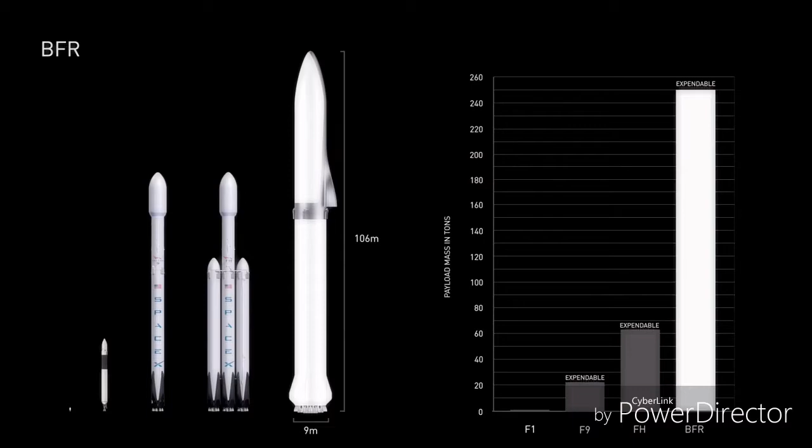So let's go to the next slide. And just by the way, with BFR, you can get a sense of scale by looking at the tiny person there. It's really quite a big vehicle. Main body diameter is about 9 meters or 30 feet.

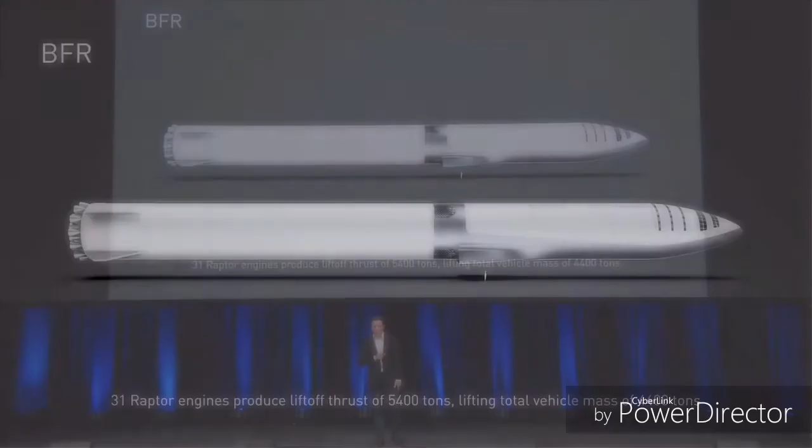And it consists of, the booster is lifted by 31 Raptor engines that produce a thrust of about 5,400 tons, lifting a 4,400 ton vehicle straight up.

So then, just the basics about the ship: 48-meter length, dry mass we're expecting to be about 85 tons. Technically, our design says 75 tons, but inevitably there's mass growth. And that ship will contain 1,100 tons of propellant with an ascent payload of 150 tons and a return mass of 50.

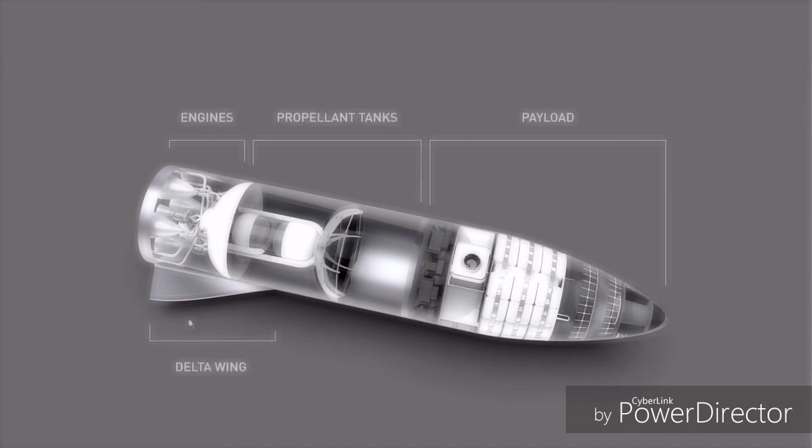So you can think of this as essentially combining the upper stage of the rocket with Dragon. It's like your Falcon 9 upper stage and Dragon were combined. So I'll go into each of these items in detail.

You've got obviously the engine section in the rear, the propellant tanks in the middle, and then a large payload bay in the front. And that payload bay is actually 8 stories tall. In fact, you can fit a whole stack of Falcon 1 rockets in the payload bay. Compared to the design I showed last time, you'll see that there is a small delta wing at the back of the rocket.

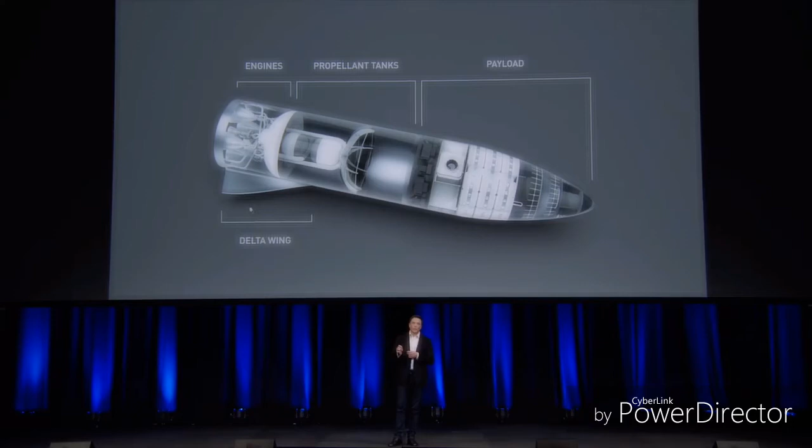The reason for that is in order to expand the mission envelope of the BFR spaceship. Depending on whether you're landing or you're entering a planet or a moon that has no atmosphere, a thin atmosphere, or a dense atmosphere, and depending on whether you're re-entering with no payload in the front, a small payload, or a heavy payload, you have to balance the rocket out as it's coming in.

And so the delta wing at the back, which also includes a split flap for pitch and roll control, allows us to control the pitch angle despite having a wide range of payloads in the nose and a wide range of atmospheric densities. So we tried to avoid having the delta wing, but it was necessary in order to generalize the capability of the spaceship such that it could land anywhere in the solar system.

So let's look at a couple of things in detail. So the cargo area has a pressurized volume of 825 cubic meters. This also is greater than the pressurized area of an A380. So it really is capable of carrying a tremendous amount of payload.

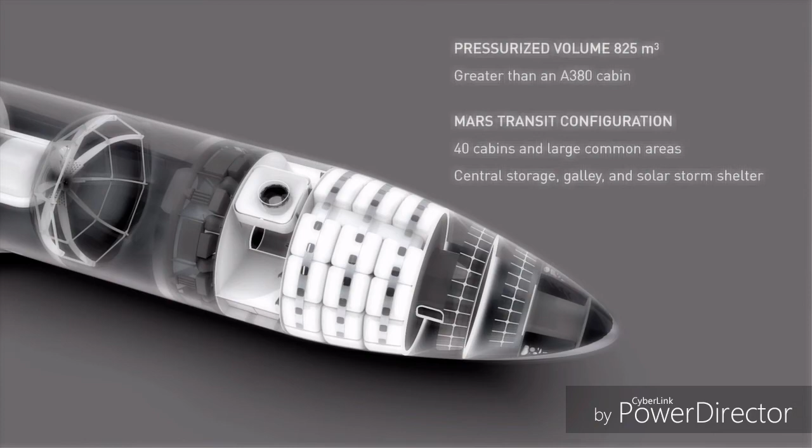In a Mars transit configuration, since you'd be taking 3 months in a really good scenario, but maybe as much as 6 months, some number of months, single-digit months, you probably want a cabin, not just a seat. So the Mars transit configuration consists of 40 cabins, and it sort of depends - you could conceivably have 5 or 6 people per cabin if you really wanted to crowd people in.

But I think mostly we would expect to see 2 to 3 people per cabin, and so normally about 100 people per flight to Mars. And then there's a central storage area, galley, and a solar storm shelter, entertainment area, and I think probably a good situation for at least BFR version 1.

Then going to the main body of the vehicle, the center body area. This is where the propellant is located. And this is subcooled methane and oxygen. So as you chill the methane and oxygen below its boiling point, you get a fairly meaningful density increase. You get on the order of 10 to 12% density increase, which makes quite a big difference for the propellant load.

So we're expecting to carry 240 tons of CH4 and 860 tons of oxygen.

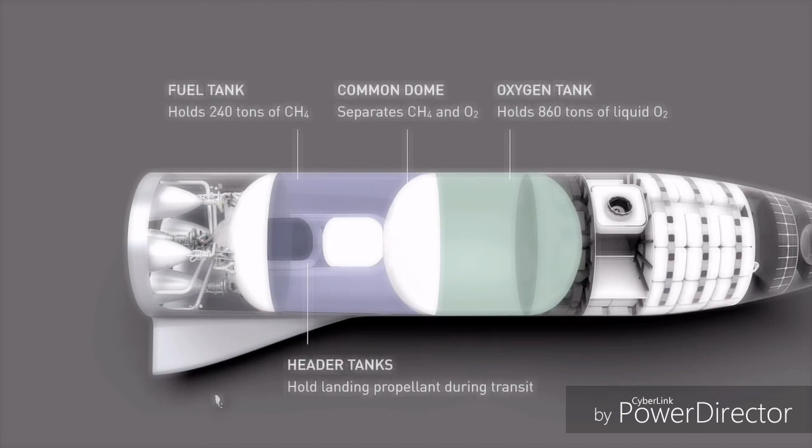In the fuel tank are header tanks. So when you come in for a landing, your orientation may change quite significantly, so you can't have the propellant just sloshing around all over in the main tanks. You have to have the header tanks that can feed the main engines with precision. So that's what you see immersed in the fuel tank.

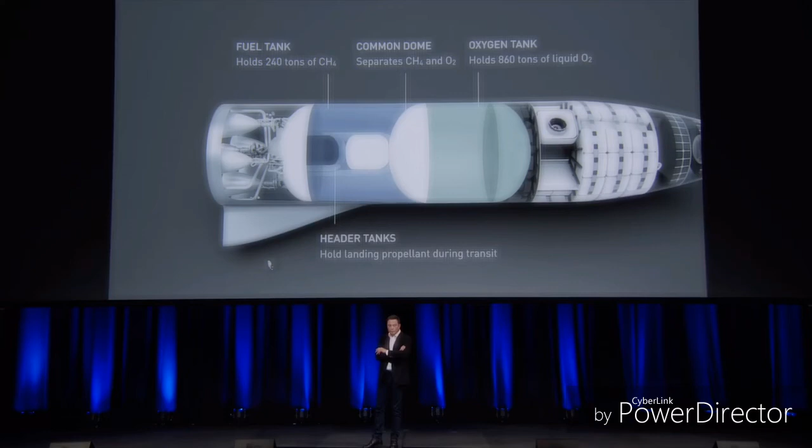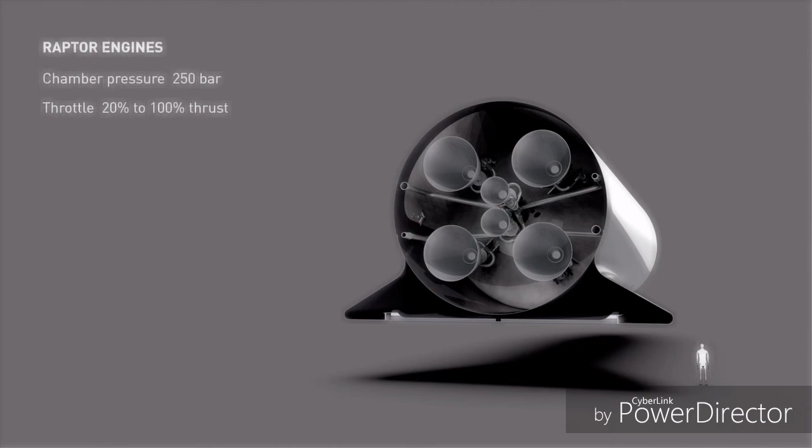Then the engine section. So the ship engine section consists of 4 vacuum Raptor engines and 2 sea-level engines. So all 6 engines are capable of gimbaling. The engines with the high expansion ratio have a relatively smaller gimbal area or gimbal range and a slower gimbal rate. The 2 center engines have a very high gimbal range and can gimbal very quickly.

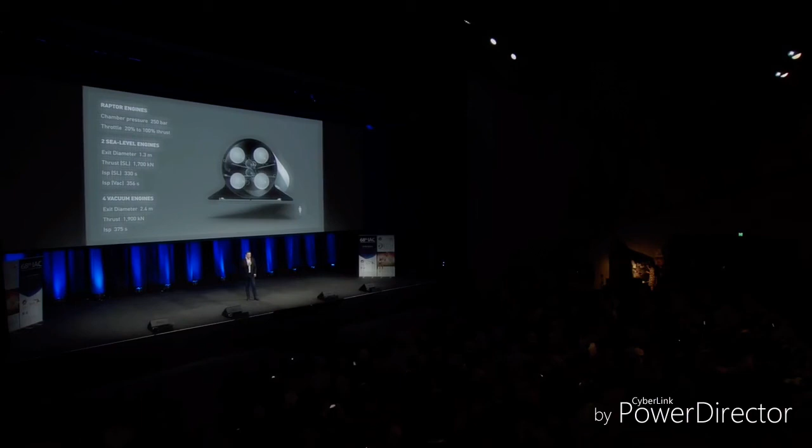And you can land the ship with either one of the 2 center engines. So when you come in for a landing, it will light both engines, but if one of the center engines fails at any point, it will be able to land successfully with the other engine. And then within each engine, there's a great deal of redundancy. So we want the landing risk to be as close to 0 as possible.

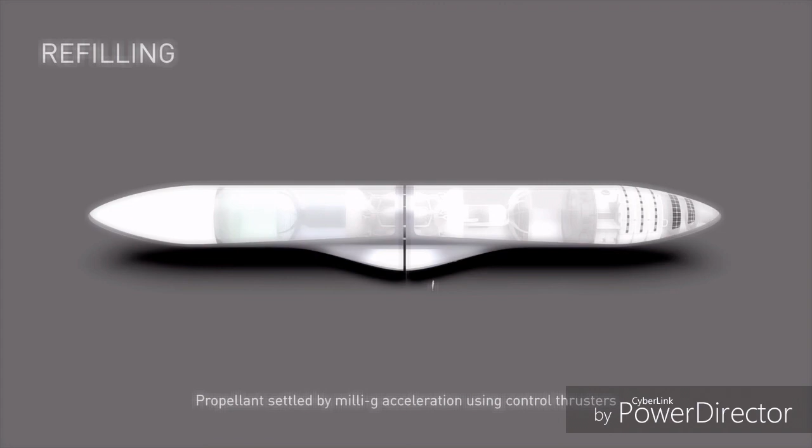And then some basic stats about the engines. The sea-level engines are about a 330 ISP at sea level. The upper stage engine is 375. Now, this is version 1, so I think over time, there's potential to increase that specific impulse by 5 to 10 seconds. And as I was mentioning, also increase the chamber pressure by 50 bar or so.

And then for refilling, where you just saw, the 2 ships would actually mate at the rear section. They would use the same mating interface that they used to connect to the booster on liftoff. So we'd reuse that mating interface and reuse the propellant fill lines that are used when the ship is on the booster. And then to transfer propellant, it becomes very simple.

Use control thrusters to accelerate in the direction that you want to empty. So, if you accelerate in this direction, propellant goes that way, and you transfer the propellant very easily into from the...